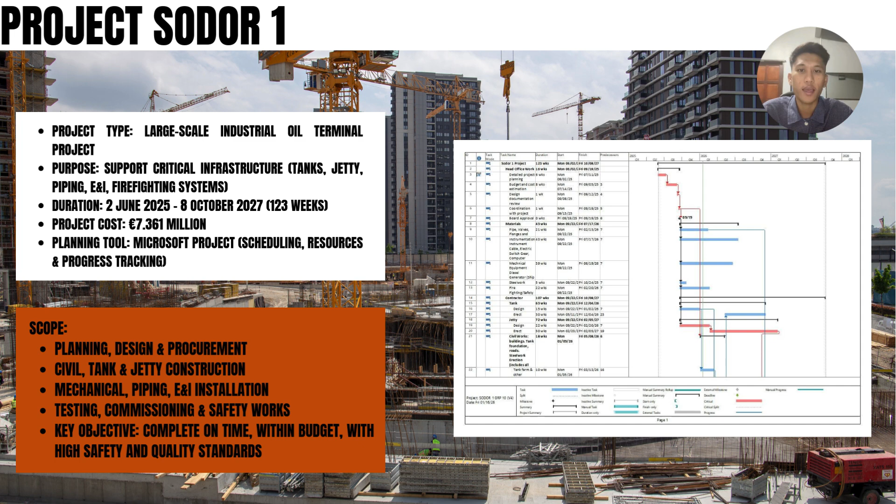Project Sodor 2 focuses on refining the procurement strategy by establishing a transparent and systematic vendor selection process. The selection of suppliers and contractors is based on a strategic balance between competitive pricing, high quality ratings and efficient delivery timelines to ensure the project's critical path remains unaffected.

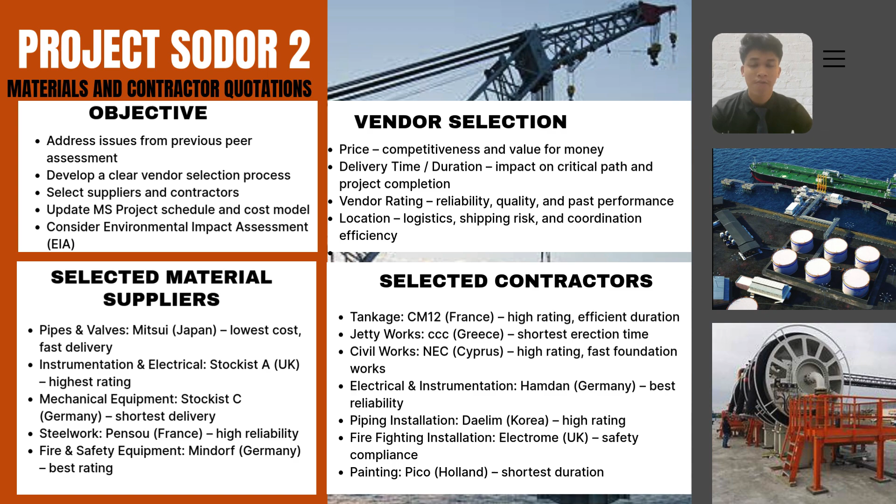For material supplies, Mitsui from Japan was selected for pipes and valves due to their low cost and fast delivery, while Stockist A from UK and Stockist C from Germany were chosen for electrical and mechanical equipment based on their superior quality ratings and short lead times.

Regarding contractors, international firms such as CM12 from France for tankage and Daelim from Korea for piping installation were appointed for their high performance and reliability. All procurement data has been integrated into the Microsoft Project schedule and cost model to ensure precise financial and time management.

Next, I want to present the project status update and execution strategy for Sodor 3, which represents a major infrastructure investment totaling 3.27 billion pounds with a project duration of 143 weeks, scheduled to run from February 2025 to December 2027. The primary objective of this phase is to improve schedule accuracy and finalize the project baseline plan.

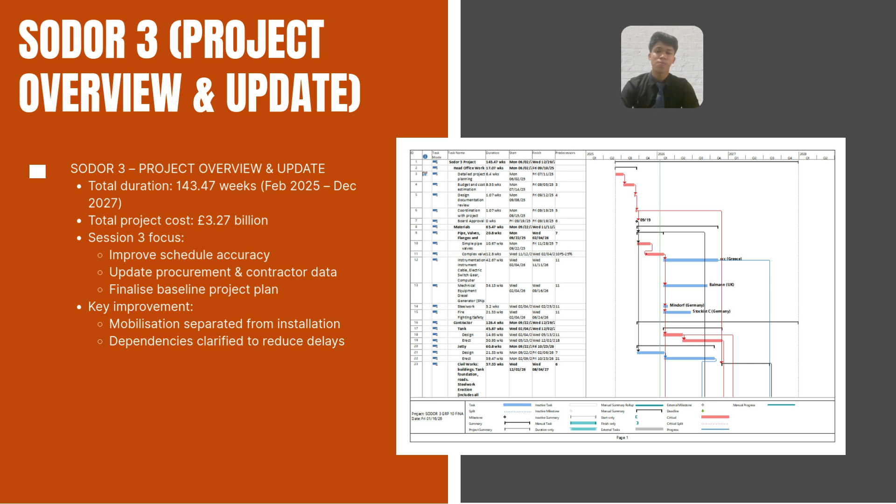A key strategic improvement in this phase is the separation of mobilization from the installation stage to prevent operational overlaps. Additionally, dependencies have been clarified to significantly reduce potential delays.

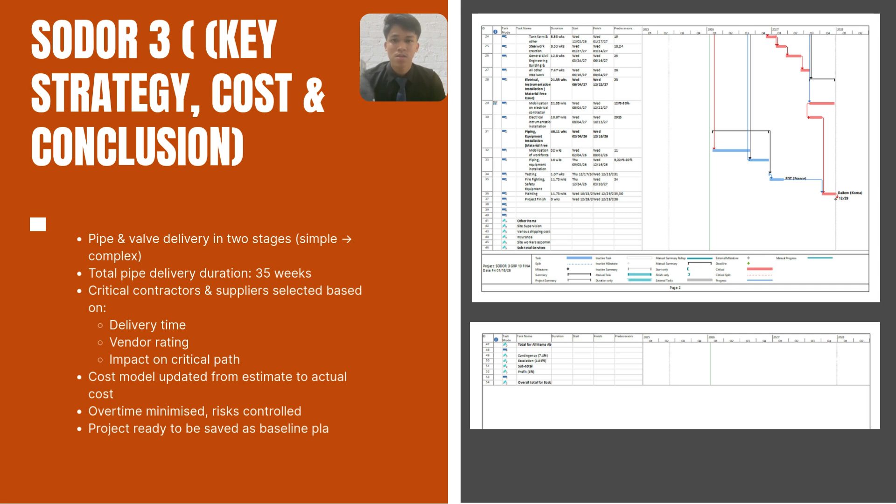The delivery of critical components such as pipes and valves is managed in two stages, moving from simple to complex over a 35-week period. These measures are designed to keep the project within budget, minimize the need for overtime, and ensure the cost model reflects actual expenditure rather than just initial estimates.

Now about the project control report, Sodor 4, at week 25. For the project status: the project started June 2025, the current duration is 116.5 weeks, and the forecast completion is 25 August 2027. The schedule was reduced through fast tracking, selective crashing, and improved sequencing.

For schedule and cost control, Sodor 4 has a new baseline established in Microsoft Project. For example, time is now set at week 25, and head office work was reduced from 16 to 10 weeks, saving 6 weeks.

For supplier performance and action: pipe work and fittings delayed 2 weeks, mitigated with a 5% premium. Instrumentation and electrical delayed 4 weeks, avoided via phased delivery with a 5% premium. Mechanical equipment required an approved 25% premium to protect the commissioning schedule. Steelwork is low risk and requires no action.

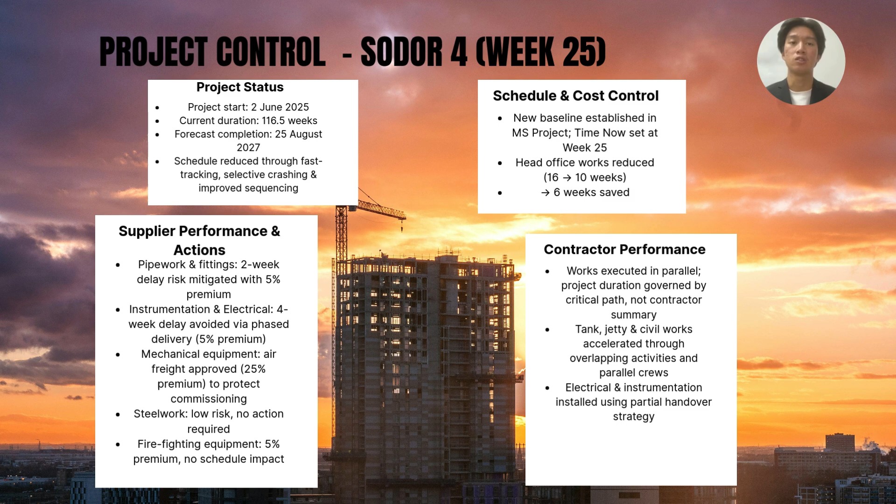And the firefighting equipment, 5% premium, no schedule impact. For the contractor performance, work executes in parallel and the project duration is governed by the critical path, not the contractor summary. Tank, jetty, and the civil works accelerate through overlapping activities and parallel crews. And the last is electrical and instrumentation installed using the partial handover strategy. So the total current duration for Sodor 4 is 116.5.

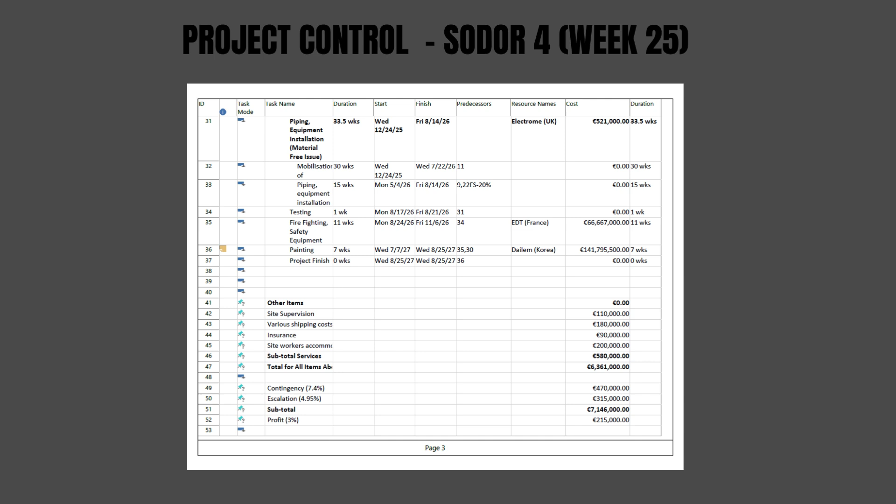So for session 5 of the Sodor 5 project, this review focused on the project status at week 45 and the key decisions made based on the performance data. So overall, the project is progressing in line with the approved baseline. Early planning, design review, approval, and coordination activities were completed as scheduled, while procurement and early construction work such as jetty, tank design and civil foundation are currently underway.

So the main challenge identified in session 5 was supplier delivery performance. To manage this, the team adopted a phased delivery and early access strategy, allowing installation work to start before full delivery was complete. So this approach successfully prevented delays to the critical path and the overall project duration.

In terms of cost, suppliers rated one confirmed 12% escalation. So as a supplier change was not allowed, the team focused on improving schedule efficiency through parallel resources and earlier installation activity. As a result, the total project cost was controlled and finalized at 2.29 billion euro without affecting the completion date. So jetty construction was also optimized by balancing early completion from high-performing contractors against delays from others, ensuring no impact on the project timeline.

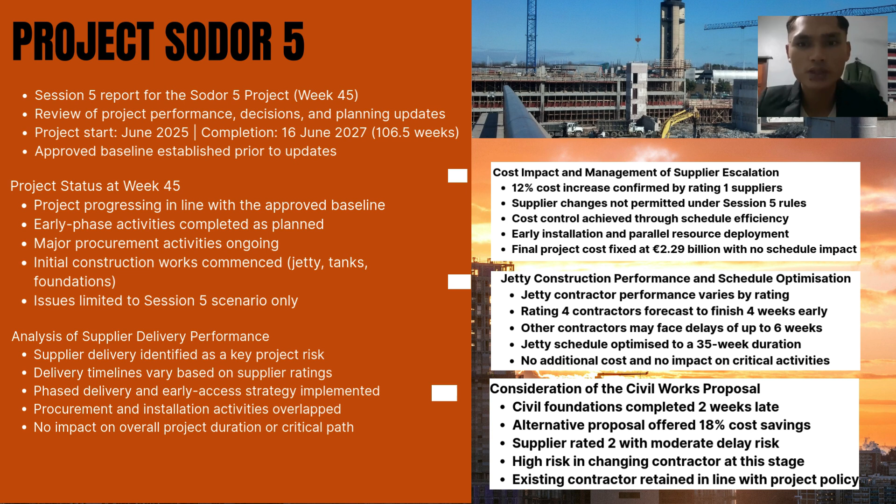So in conclusion, despite supplier and cost challenges, the Sodor 5 project remains on track to be completed on 16 June 2027 within the approved schedule and budget.

Next, I will present key outcomes of Project Sodor 6. First, the project Sodor 6 successfully achieved its planned duration; the duration was 91.17 weeks, which aligns with the original schedule target. Second, an effective scheduling strategy contributed significantly to this project's success, which is overlapping supply with installation and finishing works, no crashing of critical activities, and recovering time lost from early delay.

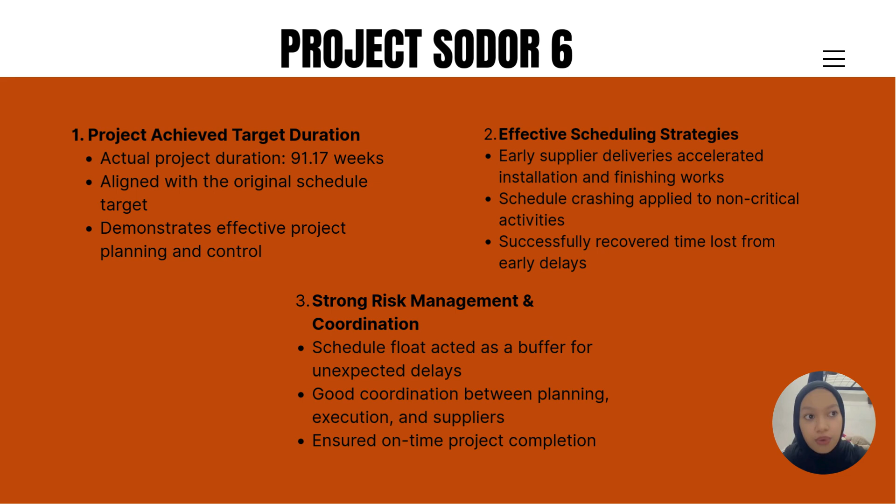So lastly, strong risk management and coordination for a smooth, successful project. In conclusion, proactive scheduling, supplier management and risk control were the key factors to achieve the project timeline.

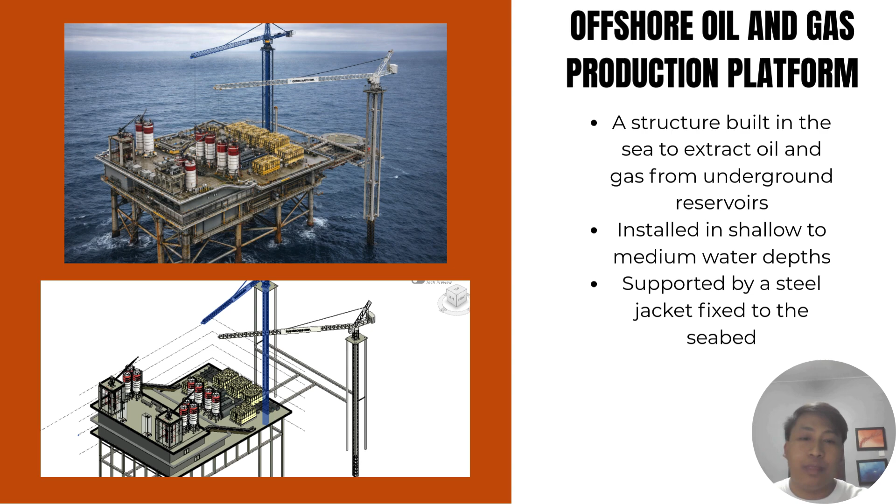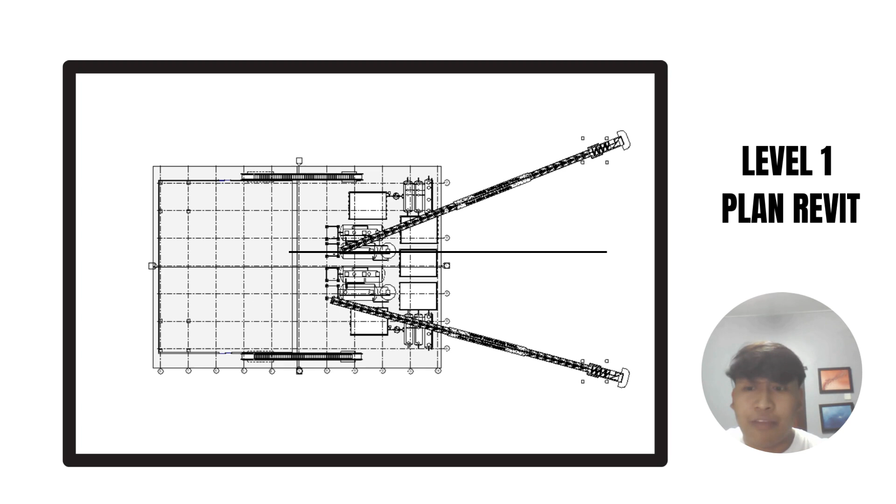So next, I will explain the level one plan Revit layout for these drawings. So for level one, the main focus is the main working and processing level of the offshore platform. It's focused on oil and gas processing activities. It houses major process equipment, such as separators, pumps, and pipelines. It provides space for material handling and equipment installations, designed to support heavy loads from machinery and operation.

So this is a level 3 plan Revit. So this level of the offshore oil and gas platform mainly focuses on lifting, access, and support activities. It accommodates crane structures that are used to lift materials, equipment, and supplies from supply vessels to the platform. The layout provides clear open space to allow safe crane operation and movement of loads.

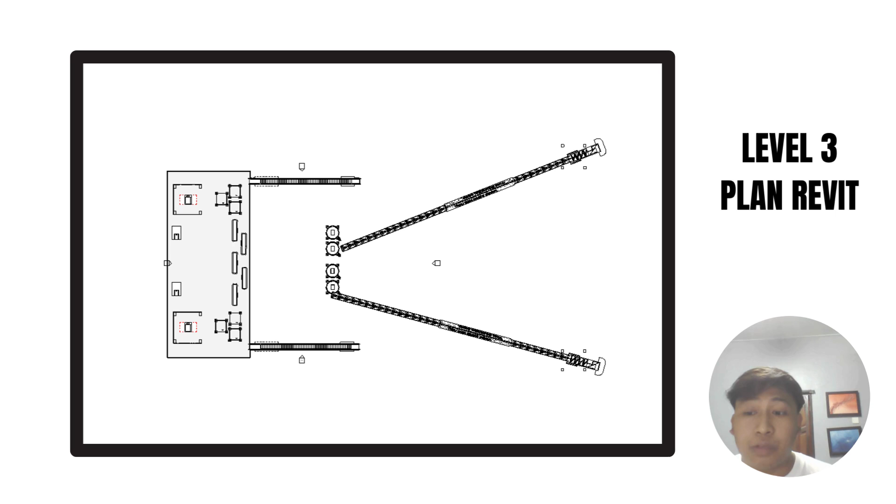In addition, this level includes access areas and structural elements that support the cranes and transport loads safely to the main structure. Overall, this level plays an important role in logistics, construction, and maintenance operations on the offshore platform.

So this slide presents the walkthrough for this platform. So the walkthrough at level 1 of the deck is designed to provide safe and clear movement for workers during daily operations. Personnel enter the level through designated access points and move along marked walkways that surround the equipment and deck area. These walkways allow workers to inspect equipment, carry out maintenance, and monitor operations without interfering with crane or lifting activities.

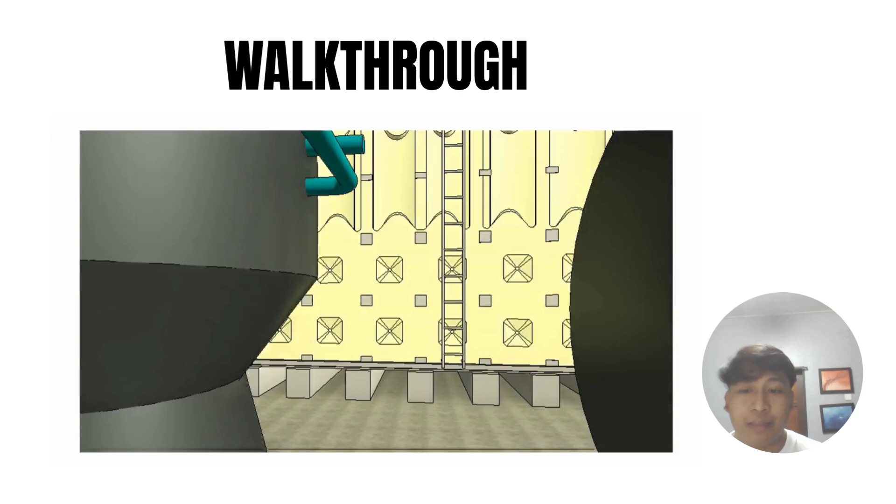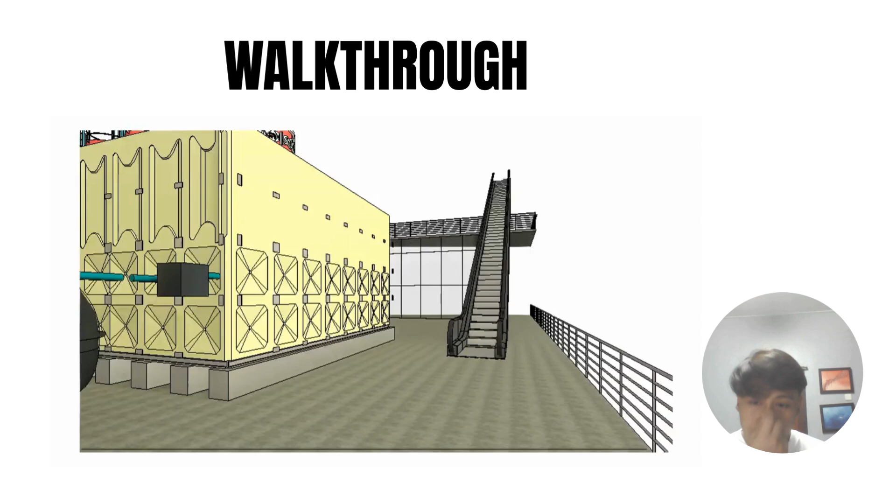And clear paths are provided to ensure safety, especially when heavy equipment is operating nearby. Overall, the level 1 walkthrough ensures smooth, safe, and efficient movement of personnel within the deck area.